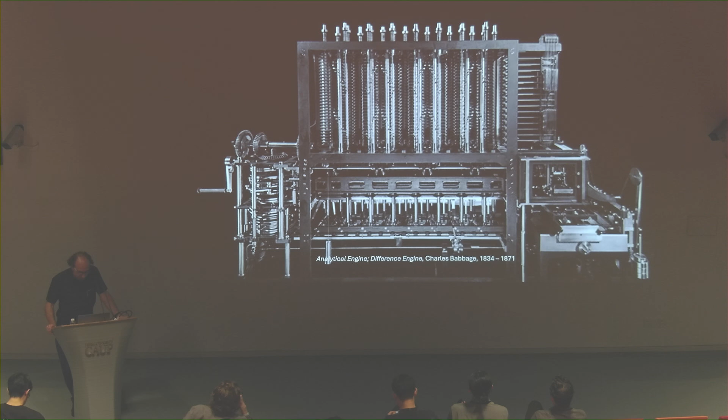Backing up to the beginning of computation, this is Charles Babbage's difference engine. It was a mechanical machine that could compute very simple mathematics, but faster than the human mind. Fast forwarding a few decades to IBM, International Business Machines as it was initially called, their slogan from 1911 was 'Think.' And Apple, in its early days, had a slogan called 'Think Different,' which refers back to that early paradigm.

And the paradigm of intelligence—sorry, that's gone very quickly—ecology, economy, urbanism, and computation. Sorry, that's on some automatic transition.

Within the context of any discussion of urbanism, certainly where we are in Shanghai—this is called the Yuxi Circle. There's a city in Western China called Yuxi, and if you draw a circle of a certain diameter, over half the population of the world is within this circle. I think this context of megacities involves terminology we don't even know how to name. This is a diagram of Jingjinji, Beijing, and its kind of satellite Tianjin, and many other cities around Hebei, the Yangtze River Delta, and the Greater Bay Area of southern China.

Questions I would like to ask rhetorically are: how do intelligent systems impact urbanism? To what extent is urbanism a model of complexity and intelligence? And how do we define urban intelligence?

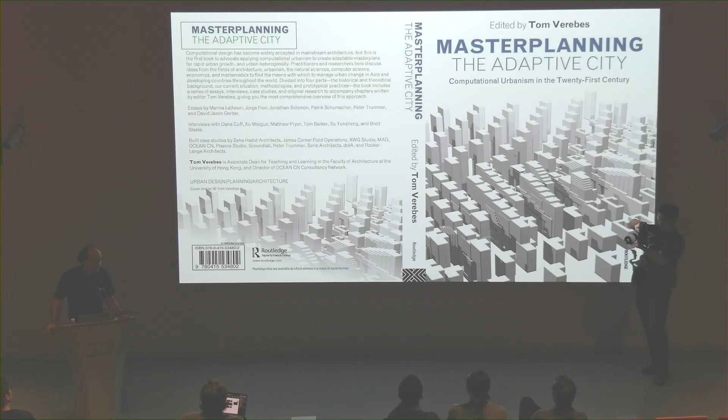In a book that I authored and edited, Master Planning the Adaptive City—which is truly a paradox, because master planning is far from adaptive. It's teleological, trying to find an end solution, whereas adaptivity is far from seeking a single solution; it looks at the potential for transformation and change.

This was published in 2013, and I think the world within which we're working as designers, and the media we're working in today, has progressed to the point where we really are able to focus on the multiplicity of possible solution spaces. I think more than ever we are in an era where we need the plasticity of thought and of technique.

Another paradigm I configured around a series of authors and projects was a guest-edited AD titled Mass Customized Cities, which raised questions of what happens when we scale up the techniques of fabrication. This was in 2015, the techniques of fabrication becoming embedded within the architect's toolbox. What happens when we scale that up to the scale of the city?

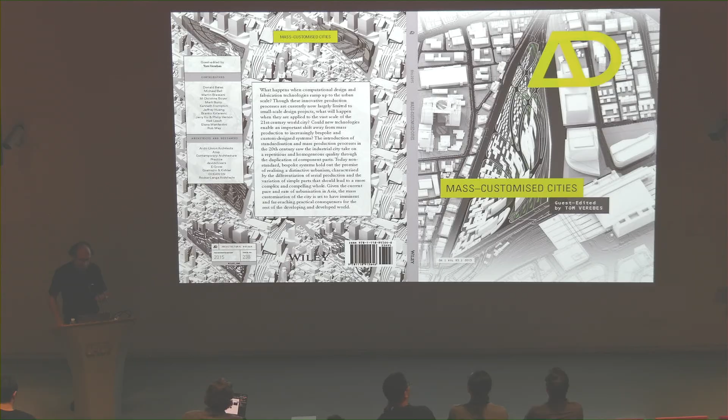There was sort of my own kind of interest imprinted onto this, and then we eventually get to City Smart and Urban Intel. This is between 2007 and 2018.

It was almost forecasting the era of AI. We were beginning to work with very primitive GANs models and such.

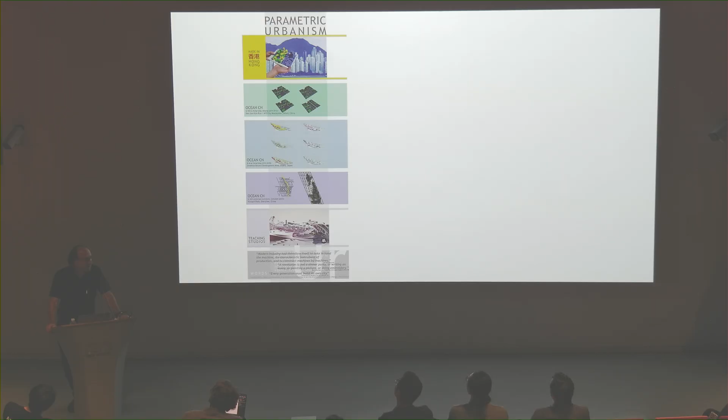In my own work, practice and teaching, there are a number of paradigms that I've focused on and championed. One is parametric urbanism, which we formulated at the Architectural Association in the Design Research Lab from 2005 to 2009. I taught at the AA from '96 till 2009.

Parametric urbanism brought the tools of parametric architecture, beginning to investigate the capacity to harness complexity and focus on the scale of the city.

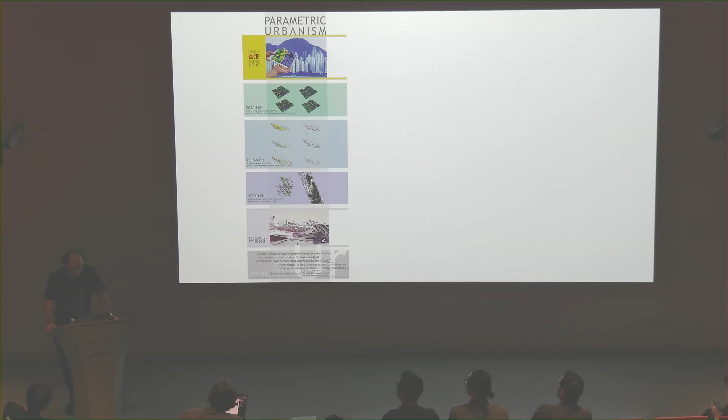The adaptive city, as I referred to in the book, addresses the ways in which the city and its designers and policymakers can manage, forecast, and usher in change, understanding the city fundamentally as in transformation, always in transformation, and asking how designers can engage and guide adaptations and evolutions of the city.

And of mass customized cities, confronting standardization and homogeneity, seeking the potential of specificity and differentiation at the scale of urbanism.

I think that these three capacities - to harness complexity, to usher in and guide evolutionary change, and to aim towards specificity and differentiation - are the properties of an intelligent urbanism.

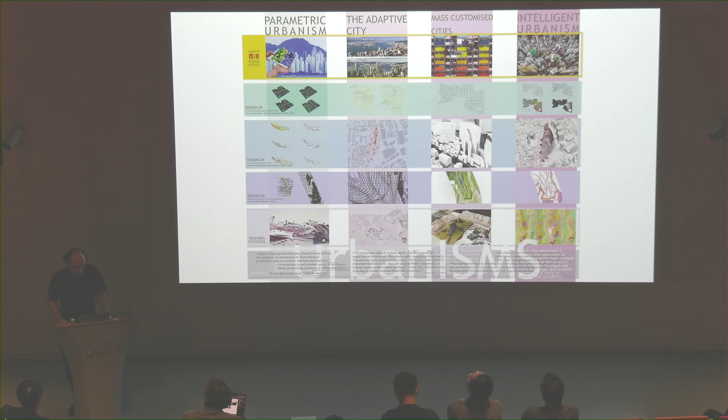I'm less interested in the smart city and all of its ethical dilemmas than I am in how designers can access new tools to harness complexity, work within an evolutionary model, and focus on the heterogeneity of cities.

It was an idea over the COVID pandemic to investigate the texts of urbanism. We were frustrated in that we were doing some work together and didn't have a reader collecting seminal texts over the era since, say, modernism, about the last 60 years or so - texts which emphasized the pre-digital and digital era.

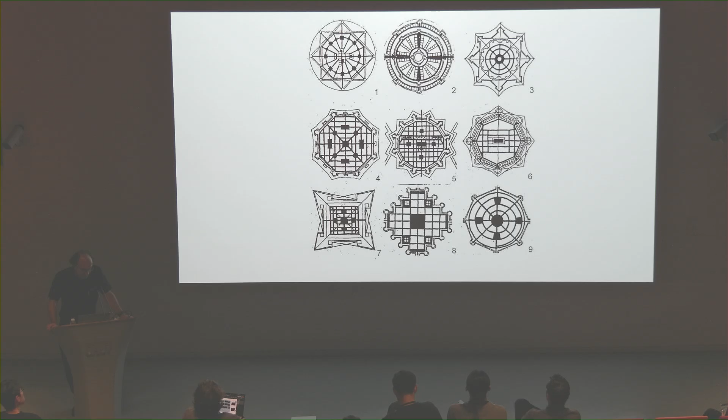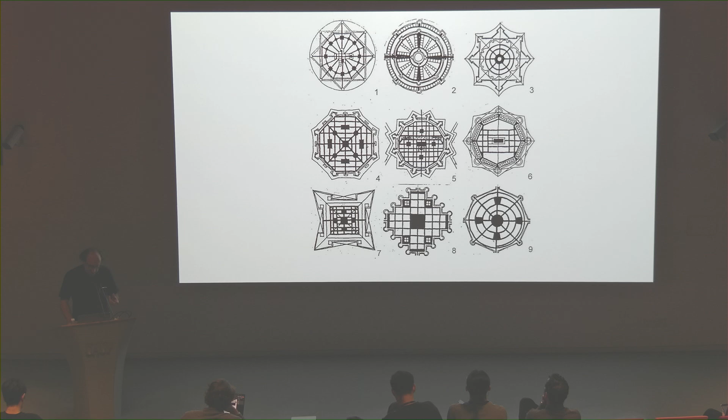These diagrams of ideal cities, from the reign of Pope Sixtus V from 1580-something onwards, models of defensive architecture are in effect a form of parametric urbanism through one criteria: the defense of small European cities. Each has a pattern related to its functionality of defense.

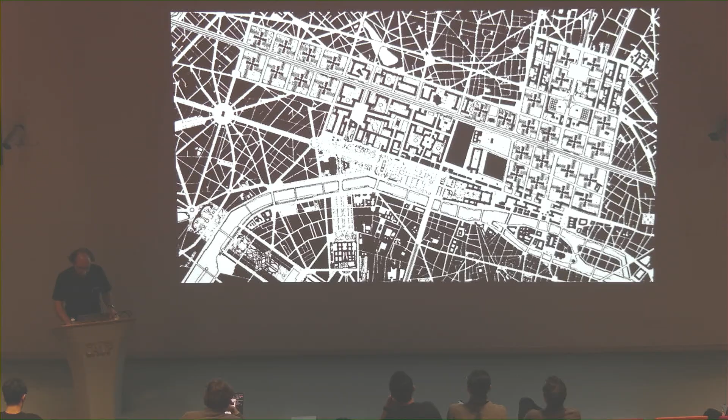And within science, the notion of recognizing pattern as the registration—sorry, that was meant to stop at some point.

Within Digital Futures, I've focused in my workshop three years ago, and also this week, on the notion of pattern, cross-referencing urbanism, scientific patterns, and the graphics of visual culture.

This is one matrix from 2023, with more detail of that matrix, and some of the patterns that were generated in 2023. Upstairs in Building D, we're doing a similar process, moving on a bit from 2023, and we'll be outputting the work through digital models, renderings, and 3D prints, beyond the generative 2D plethora of multiplicities.

This is looking at them in larger detail. They become more than ideograms—they are the generative spaces within which the latency of a three-dimensional form gets developed and modeled. We're currently at a stage where this is truly exciting, but it's also limited to 2D.

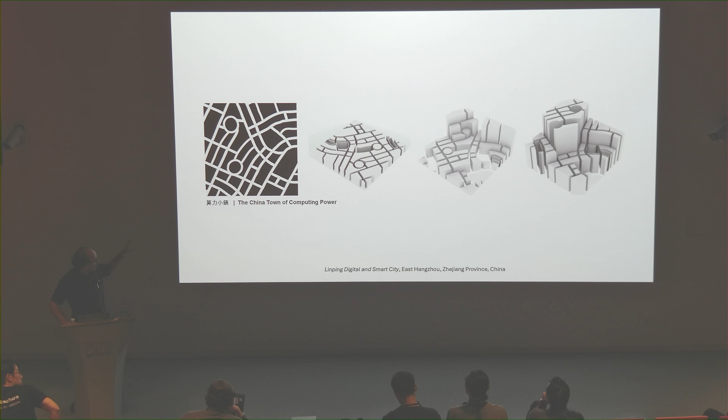Then going through a process—which we're doing upstairs as well in Digital Futures—to go from the 2D to the 3D, treating the model also as a quite plastic condition. We did this with the terminology from the competition, 'e-fashion town.' Some of these develop very particular Chinese characteristics of furniture and screen carvings and such, or field conditions related perhaps to Jasper Johns in 3D.

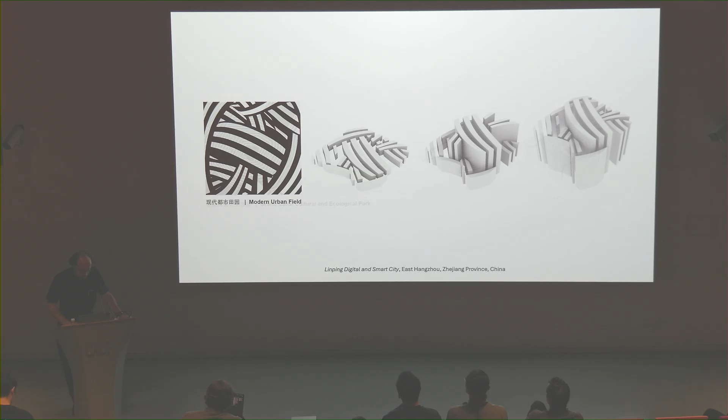And then each of these models is recombined into what was a preliminary proposal. I've never gone back to develop this further into a second stage, but I think the time is right for that.

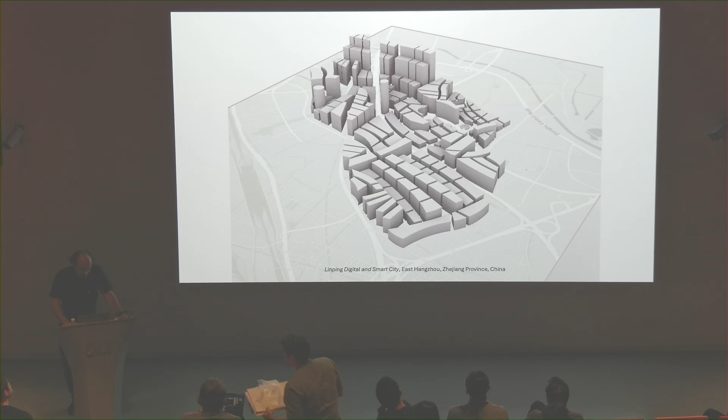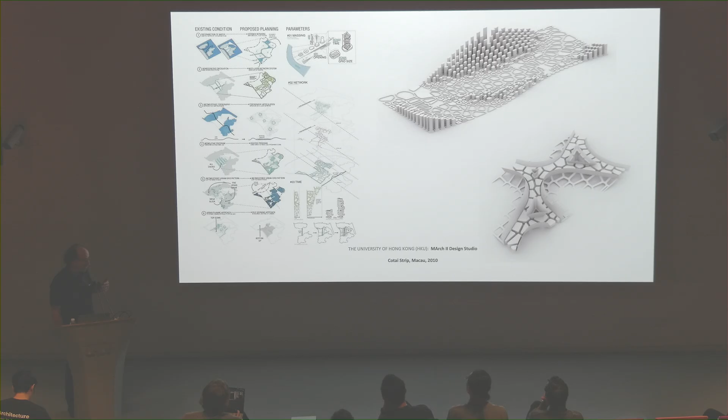I'd like to go back a little bit to one particular project at Hong Kong U. This was in 2010. The studio was called Forgetting Macau, not because of forgetting Macau in any sense, but what happened in the development of the Cotai Strip, the artificial island where all the casinos are, is that the traditional urbanism of Macau was forgotten. Instead, the ubiquity of the Las Vegas casino. At this time, 2 years after the global financial crisis, the Cotai Strip had lots of cranes left empty and lots of building sites on hold. It was an opportunity to look at the patterns of Macau and see how the remaining sites of the Cotai Strip could be developed with a dense, pedestrian-focused, grounded urbanism, albeit in a very different kind of formal and morphological logic than the rest of the city.

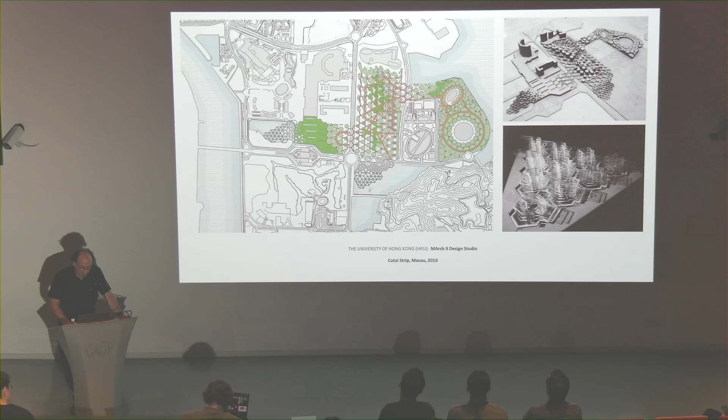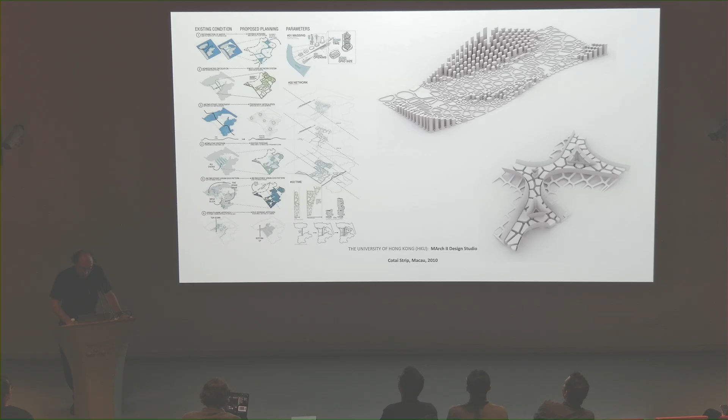I bring up this project because I think it was an instance where the sampling of the existing patterns of the city was embedded into the formation of the organization of the project.

The third chapter or argument I'd like to make of the component of generative urban intelligence is how it processes reframe design as an evolving process of collaboration between the human capacity for intelligence, computational systems, and machine learning. My interests in recent years, five years or so, have evolved from computational design towards a kind of human to AI co-creation, where design emerges through iterative dialogue, exploration, and shared agency.

John Frazer in the mid-90s, in his really seminal book published by AA Publications titled An Evolutionary Architecture, wrote, 'The emphasis shifts in this time from the design of form to the design of the process which generates form.' I think this is truly a prescient statement within a larger text, where he was less interested in the direct creation of form, but rather the design of systems that are able to create the kind of formal logic of projects and the outcomes of design.

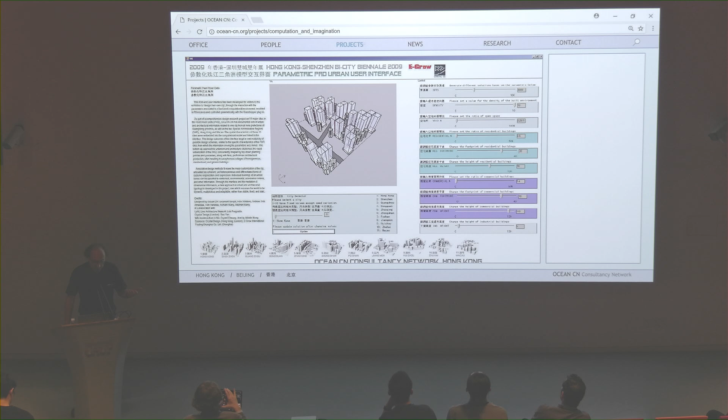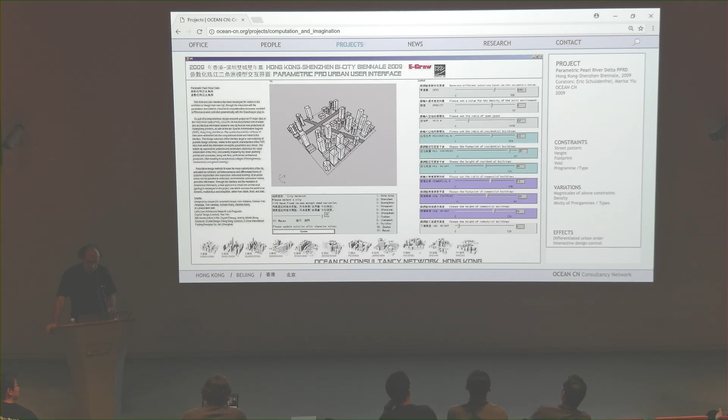Also backing up, process-wise, to an exhibition project titled The Parametric Pearl River Delta in the Hong Kong Shenzhen Biennale in 2009. We developed a back-end Grasshopper model, and in the exhibition we had a front-end interface where users worked with the mouse and the screen, moving sliders with various kinds of parameters, very simple. The model was very simple. But this, to me, was a first instance where we developed a mode in which the user could design their own city, albeit very simplistically.

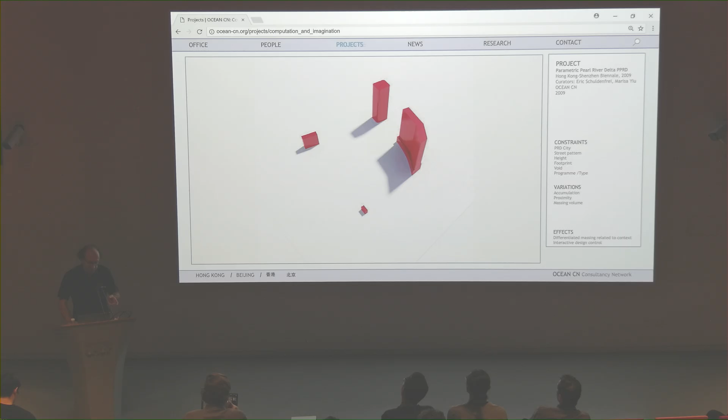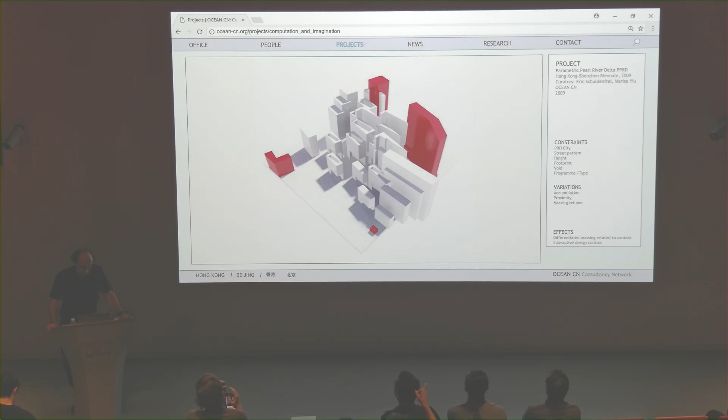The reason it was simplistic formally was the model would crash if it was at all a more complex formal arrangement. So then we took the same notion of seeds and relationships in space, programmatically, density, typology, and worked through scripting, a mode in which the variation of form and the kind of formal logic of space could be demonstrated more explicitly.

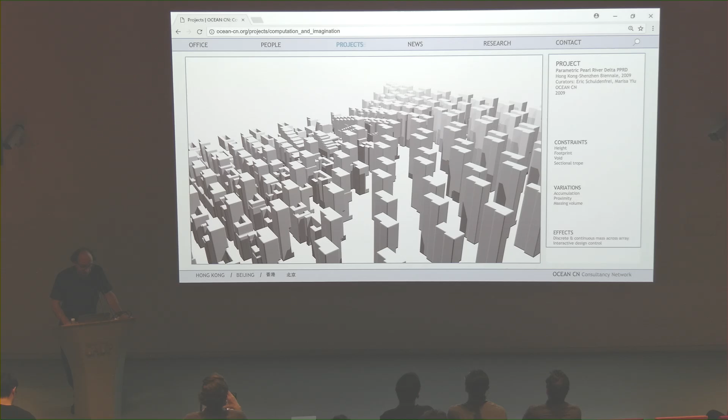Shortly after that, we developed some of these scripts to work from the notion of standardization and repetition towards increasingly inventive, plastic, and malleable formal arrangements. This era of working computationally and looking at variation, I think, is a background to the mode in which a more generative urbanism is set within.

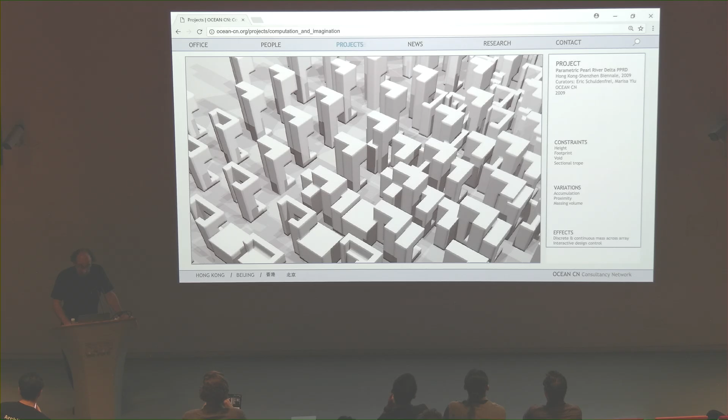The notion of a script or a particular code that can produce a multiplicity of outcomes, back to John Frazer, where we design the system that designs form rather than designing form. I think that in the context of working with generative AI in this workshop here at Digital Futures, this work to me is very much about designing that system, and now we have diffusion models that we're working with, albeit in 2D, and I think we're not far off from the potential of truly working in 3D and generative AI.

In an invited competition in Osaka in 2013-14, we developed some notions of how the model can produce a multiplicity of outcomes, and rather than proposing a single beautifully rendered project, we presented one rendering and one plan just so it could be comprehensible.

The project was effectively about developing a system with various kinds of programmatic inputs differentiated across 6 models, a range of public and private landscapes and extensive landscapes, to develop a manifold of possible future scenarios and configurations for a site.

These 6 zoning scenarios each outline a varied mix of programmatic ratios and relationships of landscape, each with a density and a typology of architectural mass associated to it.

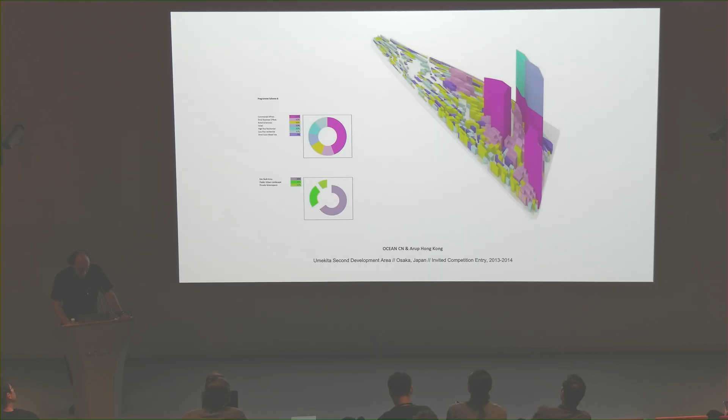Here are the 6 in more detail, cycling through them. Underneath this, in the back end, are some patterns that structure the ground and the organization of form, which I won't go through in detail, but it's also a background in a way to the work we're doing here in 2D.

At NYIT, I'll show a project later, but I'd like to show a matrix of a project organization working within generative AI across a series of different media. This is about a 3-year-old project, a 1-semester MS in urban design project, going from a database of cities I continue to work with.

Eventually having more inputs from Hong Kong, blue and green spaces codified as water and green space, leading towards models from those 2D patterns—literally hundreds of patterns and maybe 100 sample models were produced—to eventually come towards also using generative AI to describe a series of islands.

This was for a project for the East Lantau metropolis. At the time it was a live project in Hong Kong, which was dropped by the Hong Kong government, and instead they're building the northern metropolis near the boundary with Shenzhen, which is probably more sensible and ecologically sound.

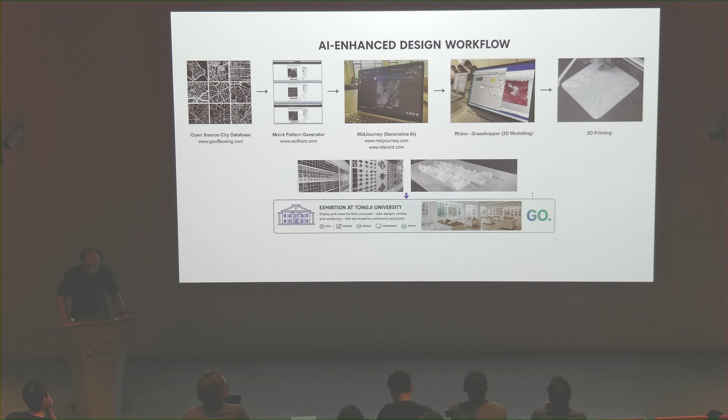This is some of the work from 2023, going from 2D patterns to 3D models, and then one model developed in greater detail.

In this series, we're working in a similar process and focusing more of our week on 3D printing and AR rendering. I believe this is a clunky and awkward stage of the evolutionary of the technologies, and I truly look forward to the time, perhaps in 3, 5, 10 years.

I'm not sure when the problem of the 3D generative AI model will be resolved. I have some colleagues and friends who are far more technically invested trying to work on the problem of 3D generative AI, and I think it's not too far off.

In terms of processes, I'd like to show one exhibition project where we experimented with the capacity to capture the city and its properties through photogrammetry models.

These are 3 parts of Hong Kong: Wah Fu Estate, Pok Fulam Village, and Aberdeen Harbour. Photogrammetry models capture pixels with color information in space, creating a model that looks somewhat photographic, all done through drones. They're a little bit grainy because they capture only so much information.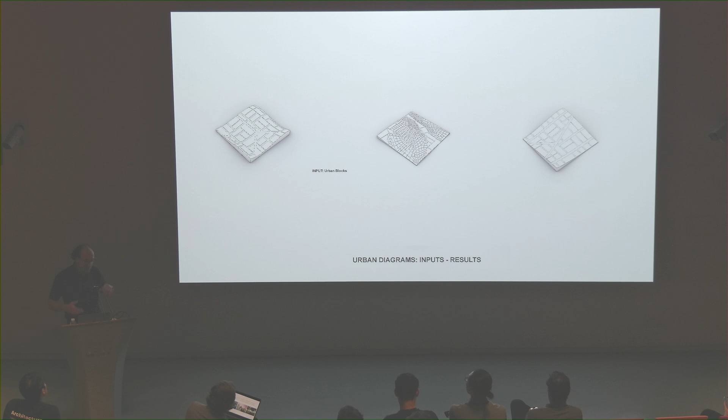We also focused on trying to capture this through drone technology, not so much for the technology itself, but for its relevance to generative urbanism. We captured the qualities of three sites, modeled them, and looked at the topographies around them, developing a language of how architecture inhabits and populates those sites—not looking like the three, but generating a new formal logic from the properties captured at different scales, integrating the three in a generative mode. This was the exhibition first presented at the Seoul Biennale and later exhibited in New York.

The final chapter or argument I'd like to make is how prototypes are not simply representations of future projects. They're also laboratories for experimentation, speculation, and learning. In architecture and urbanism, prototyping enables us to test ideas, embrace productive failure, and imagine alternative futures before they become reality.

I had another quote. I think we can look at the notion of the prototype through the action of prototyping, which goes back to the 20th century with figures like Buckminster Fuller, who devoted his entire career to developing the geodesic dome.

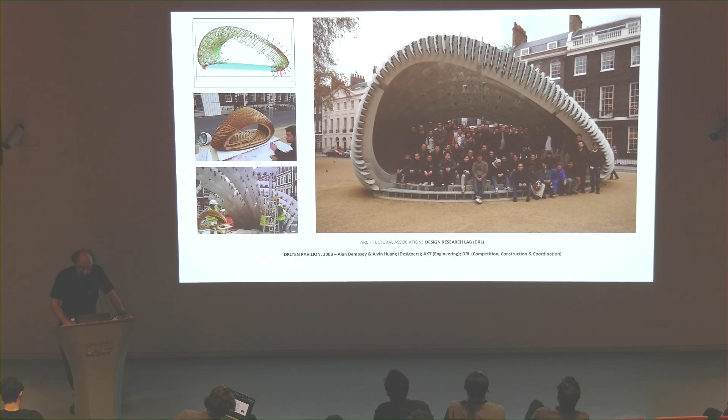At the AA, in the final cycle of students before I moved to Hong Kong U, one of the activities we did that year was to take a material of 13 millimeter fiber reinforced concrete and develop a prototype, a 1-to-10 scale model that worked and helped debug some of the problems. We built a pavilion as a prototype, and it was installed for several months in Bedford Square in London, outside the AA.

Prototypes such as Gramazio Kohler's robotic brick wall at the Venice Biennale in 2008, I think, were a prototype for them to build larger scale architecture of walls at the scale of envelopes much later.

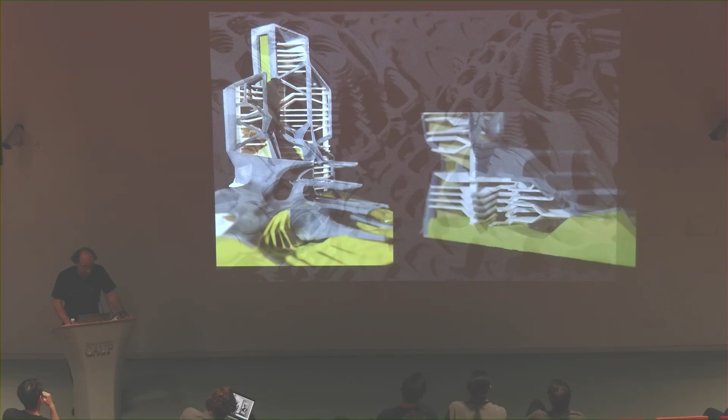The notion of the prototype in a studio, as a visiting professor at UPenn some years ago, the fabrication lab became the kind of studio where we developed lots of models at different scales—overall site models, more detailed models, larger and smaller scale architectural models, more abstract models—being very promiscuous in combining different kinds of media, materials, and machining.

In terms of architectural prototypes, I'll show some work from two books that came out of a seminar I've run at New York Institute of Technology, a graduate seminar for the last 6 years. The first 3 years produced a seminar called Beyond the Envelope, producing a book of interviews and diagrams by students, post-produced, and the more recent seminar on Ground.

Those interviews included Philip Yuan and a project by Archi-Union. Because it was the pandemic in fall 2020 and spring 2021, everybody was still at home working remotely, and everyone said yes to the invitation to be interviewed. The following two years, my dean, Maria Perbellini, asked that we do this as a public event series, where we would pre-cook questions and ask the architect in a Zoom call that was publicly part of our series.

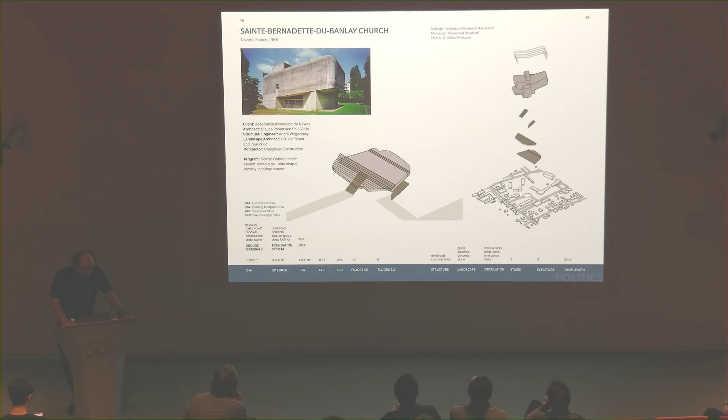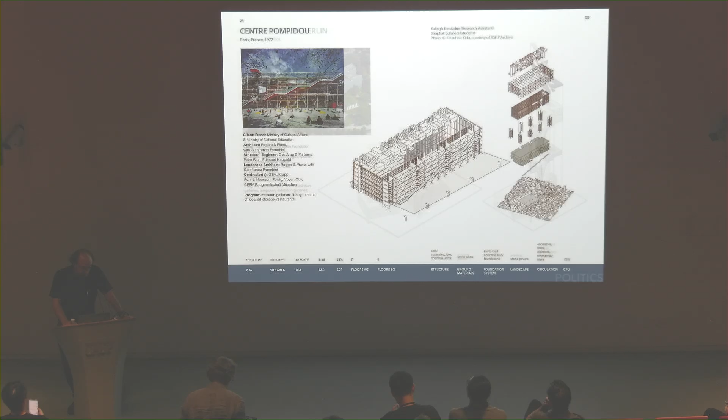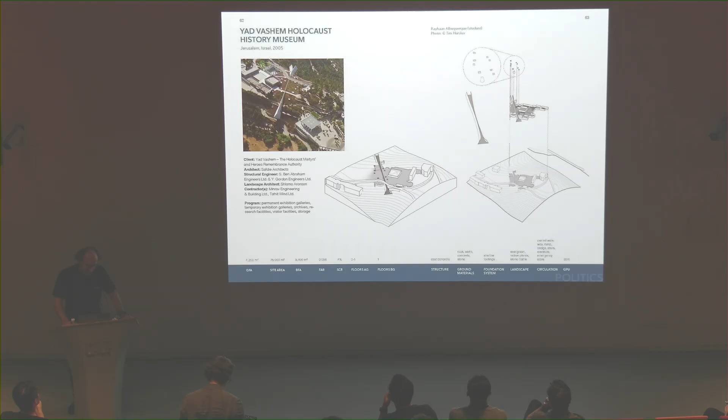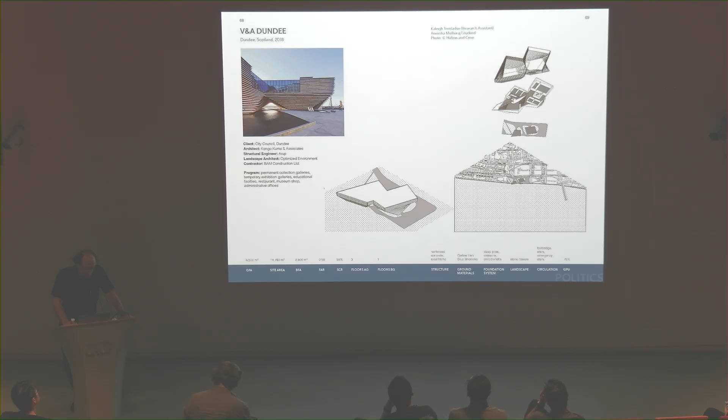The projects: Parent Virilio in France, Niemeyer in Paris, Frei Otto at the Munich Stadium, Centre Pompidou by Rogers and Piano, the Jewish Museum by Libeskind, Museum of Contemporary Art, Parliament of Scotland by EMBT, Yad Vashem by Safdie, Oslo Opera House by Snøhetta, the Louvre Abu Dhabi by Jean Nouvel, V&A Dundee by Kuma.

And the projects in ecology, the second chapter, reposition the ground as a living ecological medium where landscape operates as environmental media integrating topography, hydrology, climate, material performance, and negotiating between the notions of artificiality and nature.

The projects in this chapter advance notions of regenerative and climate responsive architecture, engaging biodiversity, ecological processes, resilience as fundamental project drivers. The essays here extend ecological thinking beyond sustainability, proposing new models of living systems, regenerative design, biological intelligence,

and AI-mediated environmental practice, collectively repositioning architecture within planetary processes.

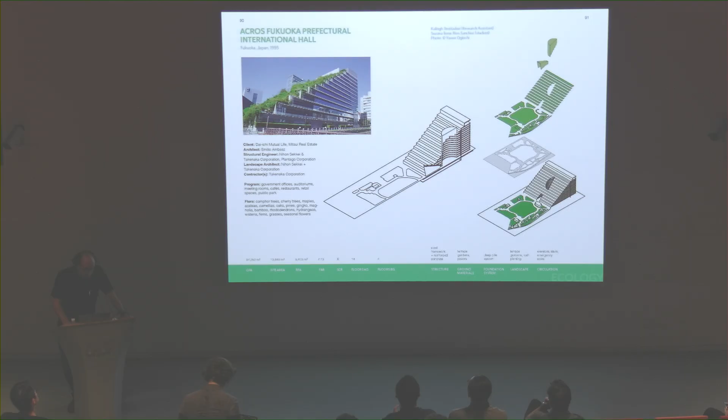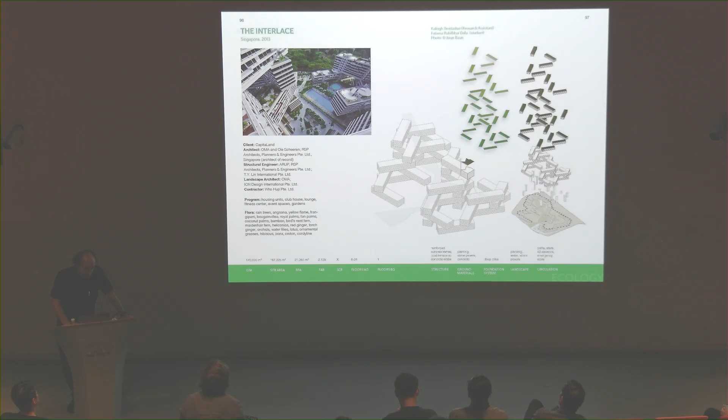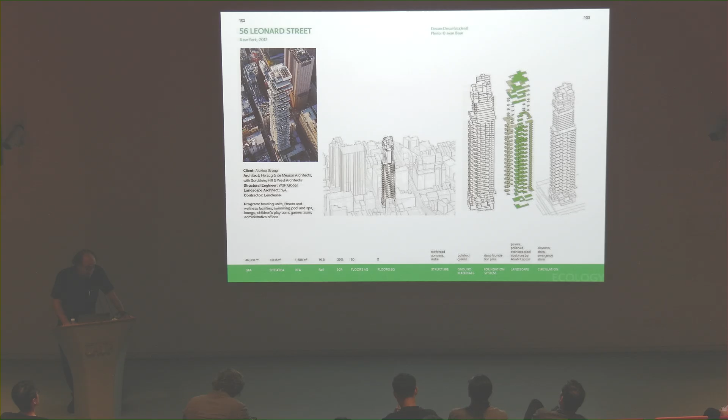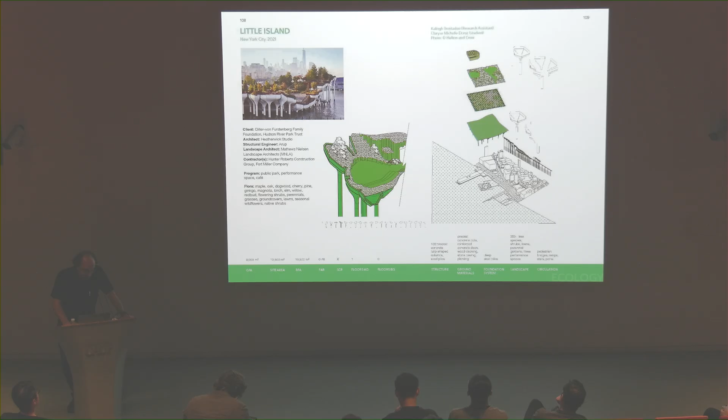The projects in this chapter include Arcosanti by Soleri, Acros Fukuoka by Ambasz, Chichu Museum by Ando, the Vanke Headquarters by Steven Holl, the Interlace by OMA and Ole Scheeren, Yanweizhou Park by Turenscape, the Pan-Pacific Orchard Building by Woha in Singapore, 56 Leonard Street by Herzog & de Meuron, Copenhagen Power Plant by Big, the Chapel of Sound by Open Architecture, Little Island by Heatherwick, the Asian Games by Winka Dubbeldam.

And lastly, the Lucas Museum of Narrative Art, finished this year by MAD.

And so the third chapter in mobility reconceived the ground as a performative infrastructural field, shaping movement, connectivity, and relationships between architecture and the wider urban network.

Through gradients of surface, thresholds, and circulation systems and spatial sequences, these projects choreograph flows of people, information, and activity, transforming mobility into an architectural and urban design medium.

The essays in this chapter reconceive the ground as an adaptive, networked, and programmable medium, exploring how mobility, digital infrastructures, ecological systems, and responsive technologies have the capacity to transform architecture into an evolving field of dynamic relationships and flows.

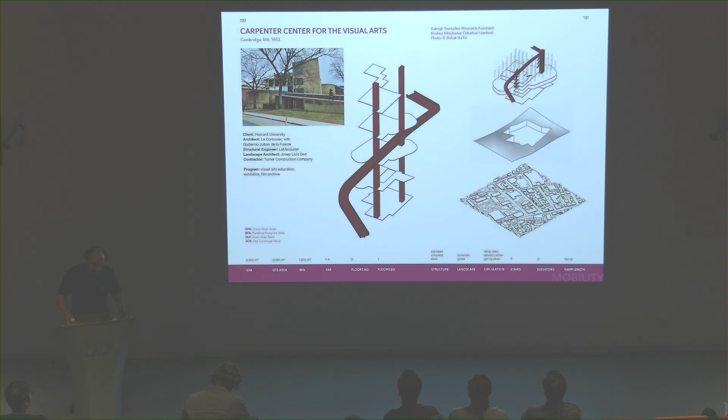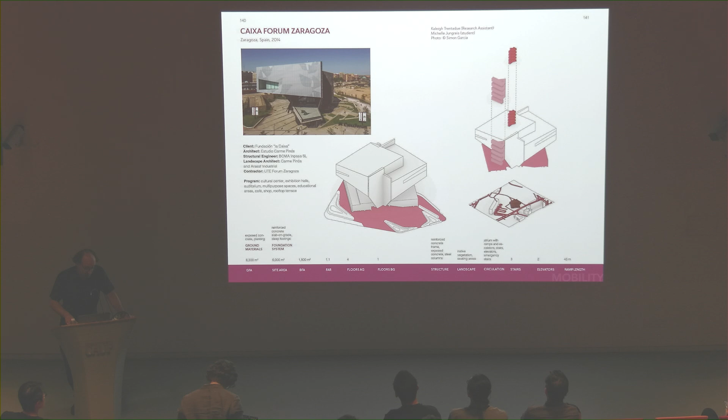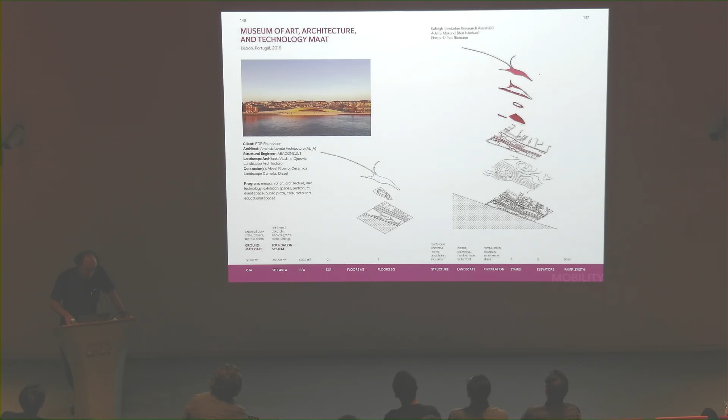We start with the Carpenter Center by Corbusier, Berlin Free University, the Kunsthal Rotterdam by OMA, the Eden Project by Grimshaw, the Perot Museum of Nature and Science by Morphosis, the Caixa Forum, Arnhem Station by UN Studio, West Village by Jiakun Architects, and the MAAT Building by ALA, and the National Museum of African American History and Culture by Adjaye Associates.

The projects in the final chapter, Tectonics, investigate how material systems, geometry, computation, and fabrication are redefining architecture's relationship to the ground through innovation in structure, surface, and construction.

Tectonics emerges in our contemporary field as both material and computational intelligence, where performance, expression, and the convergence of digital and physical processes reshape the agency of architecture. The essays in Tectonics propose an expanded tectonic paradigm in which material intelligence, computational design, AI fabrication, and temporal adaptation converge, redefining architecture as an emergent, performative, and continuously evolving system.

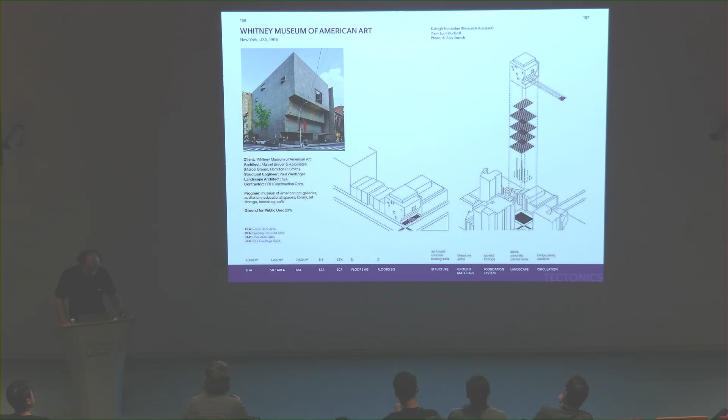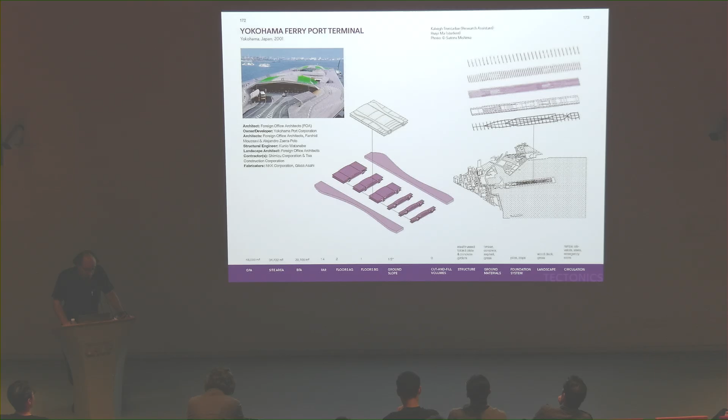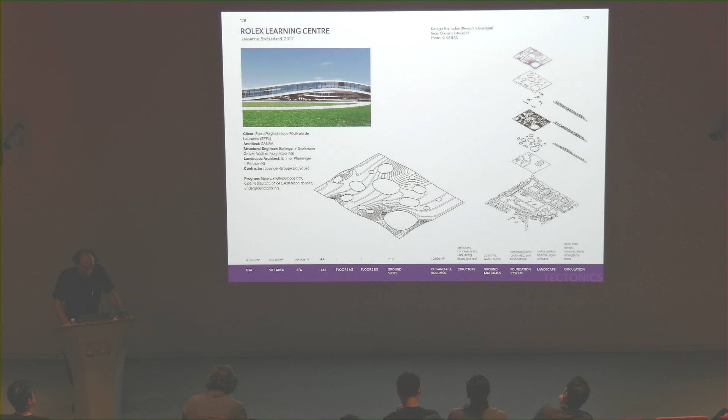The projects in this final chapter include the Whitney Museum of Art, the Étoile-d'Ivry, a wonderfully wild project, Villa VPRO by MVRDV, FOA's Yokohama project, the Mercedes-Benz Museum by UN Studio, BMW World by Coop Himmelblau, the Rolex Learning Center by SANAA, Toshima Art Museum, the City of Culture of Galicia by Eisenman Architects, the Metropol Parasol, and the DDP by ZHA, and Fondation Louis Vuitton by Gehry, and the Quay Quarter Tower by 3XN.

This was worked on together with my research assistant and former student, Kaleigh Trentadue, and the various essay authors who contributed to the book, including Sanford Kwinter, Caroline Bos, Peder Anker, Matias del Campo, and Sandra Manninger, and several others. Just briefly to conclude, I'm coming close to, or maybe even overtime.

Urban prototypes. One of the most influential on myself was Expo 67 in my home city of Montreal. Several of the pavilions remained, Bucky Fuller's Dome and a few others. So in my childhood, they were influential in guiding me towards a selection of architecture as a future career.

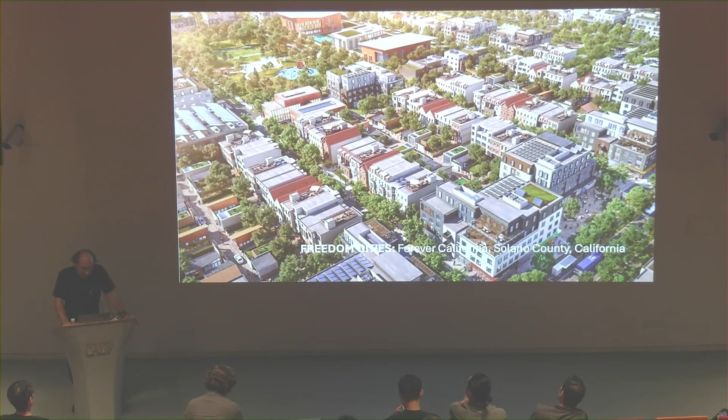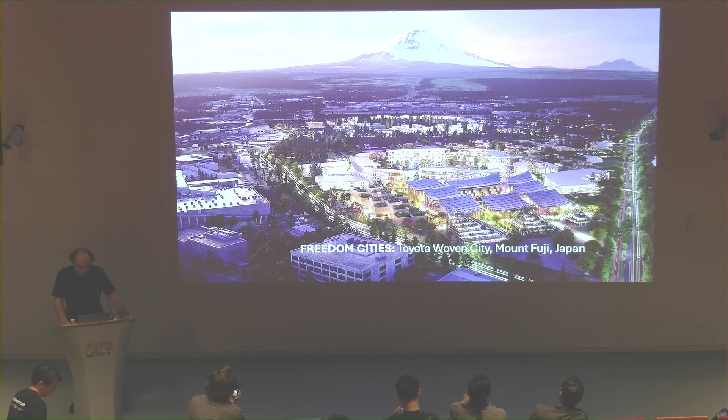The Freedom City of the Toyota Woven City near Mount Fuji in Japan is a built prototype with autonomous vehicles, robotics, and smart infrastructure. The Xiong'an New Area in Beijing is a state-led prototype as a model for smart, green, and innovation-driven urban development.

Sidewalk Labs, some of these aren't so worrying. Maybe Sidewalk Labs is less worrying, a subsidiary of Google Alphabet, for a smart district in Toronto's waterfront. Of course, it was dropped, it wasn't built. This is built for a city in Malaysia, very much a kind of vertical green eco-city, so-called, maybe because it's just covered in green.

The unbuilt Telosa city being planned in Northern California, and Prospera in Honduras, which exemplifies the Freedom City model of privatized urban development as an enclave with its own government and regulatory framework, promoting really a kind of libertarian economic model. And the Line in Saudi Arabia, now on hold for the next 4 years, represents an extreme vision of the Freedom City model, an entirely privatized and master-planned urban project governed by corporate and state interests.

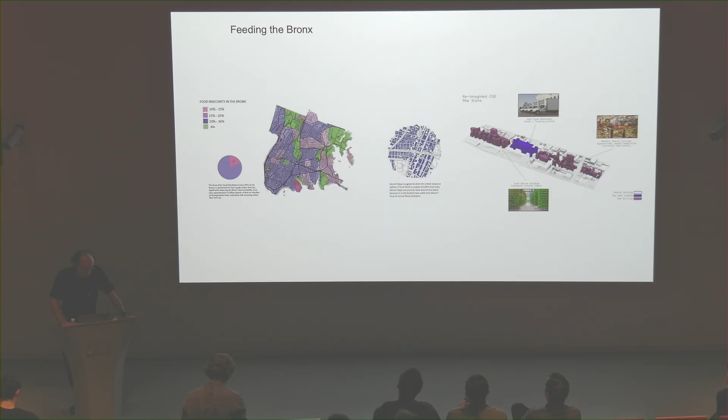I'd like to end with an urban prototype from a recent studio at NYIT. The project, titled Feeding the Bronx, developed an urban prototype for the capacity to feed a district of the Bronx of approximately 15,000 people with hydroponic farming over the Cross Bronx Expressway.

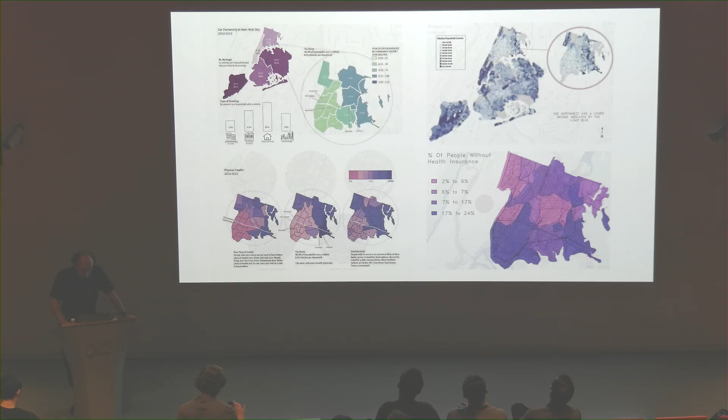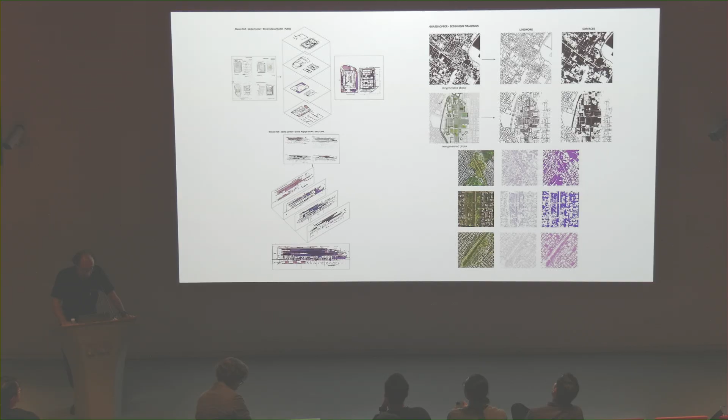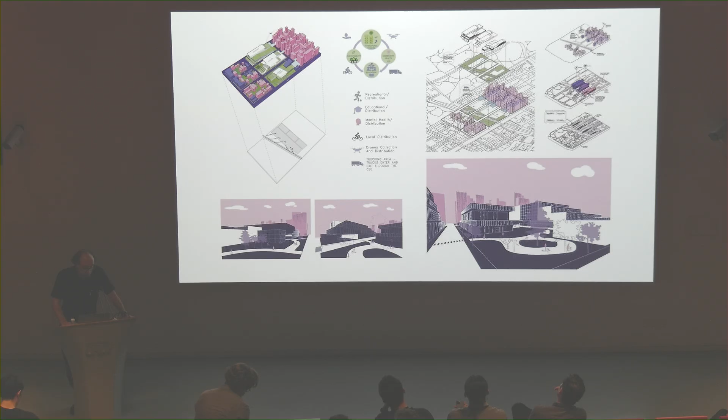The urban studio analyzed all kinds of demographic, ecological, and infrastructural information, and we engaged in a kind of mapping at the scale of the Cross-Bronx Expressway, of the Bronx, of a series of sites on the Bronx, deciding which would be best. We found the notion of the food desert in the most impoverished of the boroughs of New York City, and then developed, through generative AI, both planimetrically and in section, a project that would span the Cross-Bronx Expressway and cap it over to build a facility of hydroponic farming, and lots of other food-related programs as a prototype for urban development.

To conclude this thesis on generative urban intelligence, I think it is ultimately less about automation and efficiency than it is about augmentation and acceleration, expanding our capacity to perceive patterns, imagine alternatives, and prototype possible futures. We've entered an era in which new computational tools and emerging worldviews are as exciting as they are revolutionary, transforming not only how we design architecture and urbanism, but how we understand intelligence, creativity, and our collective responsibility for shaping urban futures.